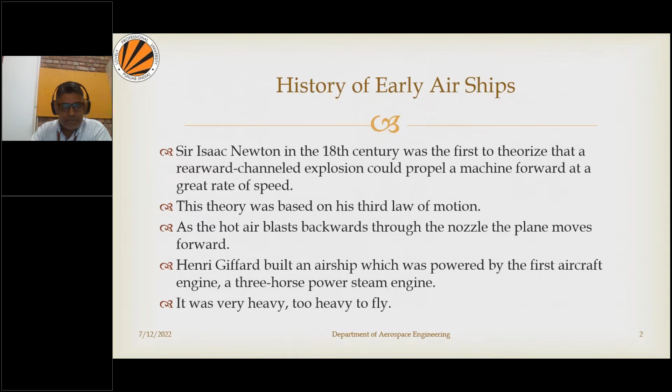And coming after that, Henri Giffard, which you could rightly see on my screen over here, this was Henri Giffard's airship. It was way back in the 19th century somewhere, and it was considered to be the most powerful one and the first aircraft engine. It was powered with the first aircraft engine, having a 3 horsepower steam engine. It was very heavy in comparison, and it was very heavy to fly also.

So this airship successfully flew on the 24th of September somewhere in 1852, and it covered near about 17 miles, approximately 27 kilometers. And the engine was not so powerful that it could overcome those prevailing winds, because once the aircraft is in the air, you find air coming from all directions. So Giffard had to return his flight back, and the top speed that was talked about at that particular time was 6 miles per hour.

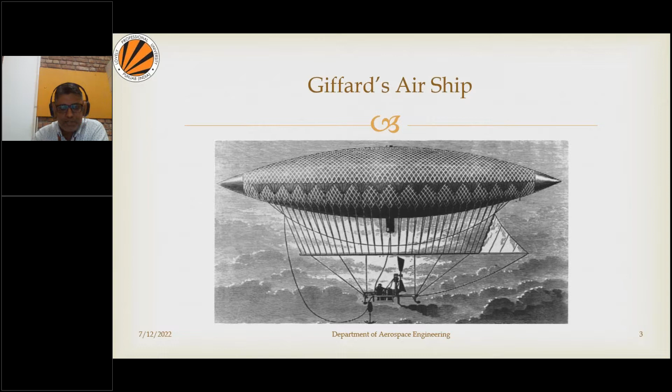However, he managed to circle this airship in slow circles, proving that if the weather is very calm, this airship would have been beneficial. There were further unsuccessful efforts done throughout this era, like Hiram Maxim, who also tried out with a certain triplane. In 1896, we had an unmanned airplane powered by a steam engine, called the Aerodrome.

And then further it came down to Otto Daimler in the late 1800s, where he invented the first gasoline engine, what we are talking about today as a petrol engine. And after that, everything came into account, so in 1903, something which we called the Flyer.

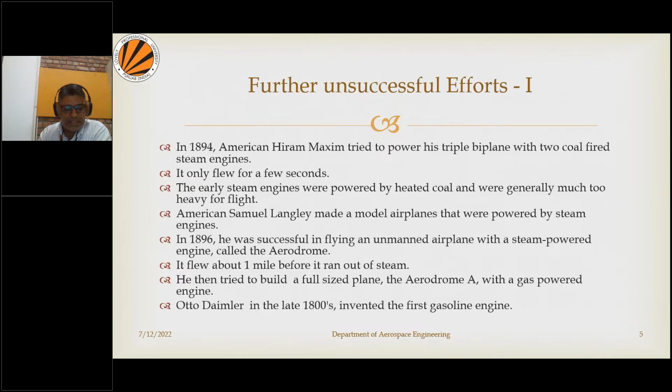The Wright brothers came up with a flyer that had a near 12 horsepower gas-powered engine. In the late 1930s, this gas-powered engine was being used as a reciprocating internal combustion engine, and it had a propeller as the sole means to propel that particular aircraft. So coming to this very important concept that everybody should know about.

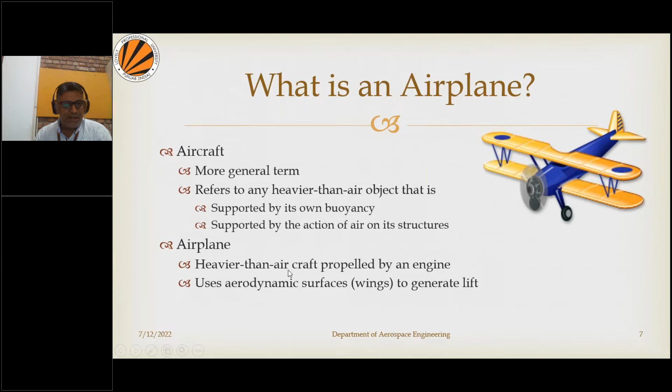What I want to talk about is, basically, what is an airplane? If I'm talking about an airplane and an aircraft, there are two different conceptions here. When I say aircraft, there's a difference between an aircraft and an airplane. Looking at this diagram, aircraft is a more general term referring to heavier than air objects supported by their own buoyancy and structures. An airplane is something heavier than air, but it uses aerodynamic surfaces to generate lift, like wings.

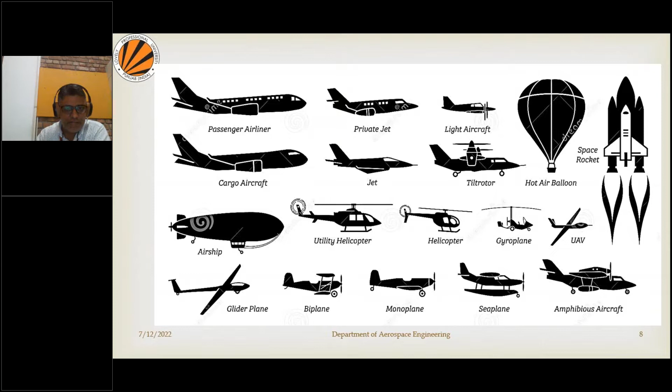So we can come to one important conclusion: every airplane is an aircraft, but not every aircraft is an airplane. That's because an airplane uses aerodynamic surfaces like wings to generate lift. That is the basic difference between an aircraft and an airplane, and that's what we talk about normally. So this is how it looks.

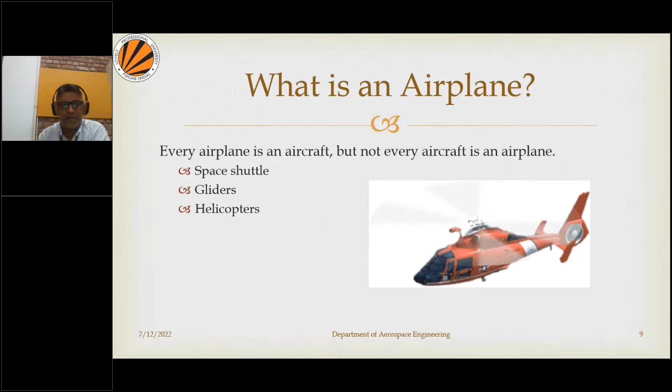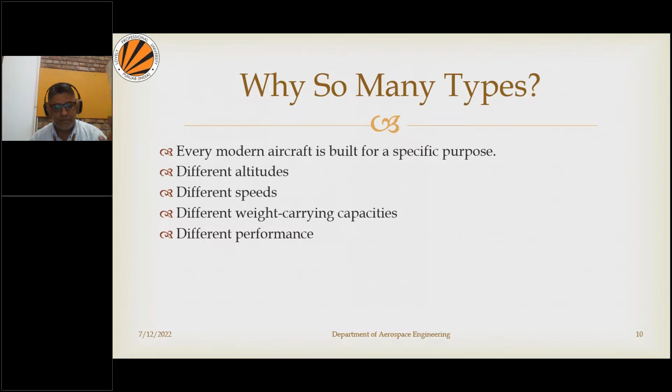Then, talking about why there are so many types of modern aircraft - it's because each is designed for a specific purpose, which can be anything: different altitudes, different speeds, different weight carrying capacities, different performance parameters. For jet aircraft, they are relatively lightweight, highly maneuverable, and very fast, carrying a small amount of weight including fuel, with refueling possible during long flights.

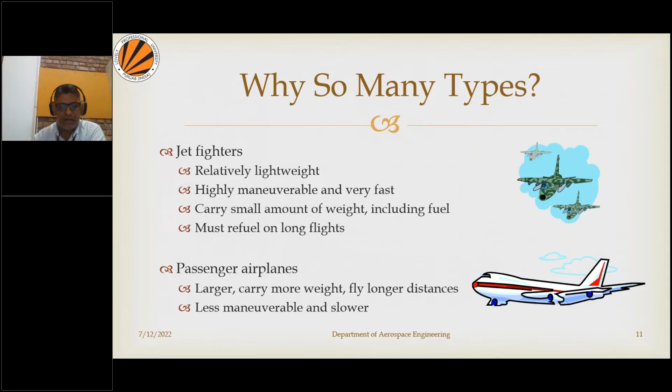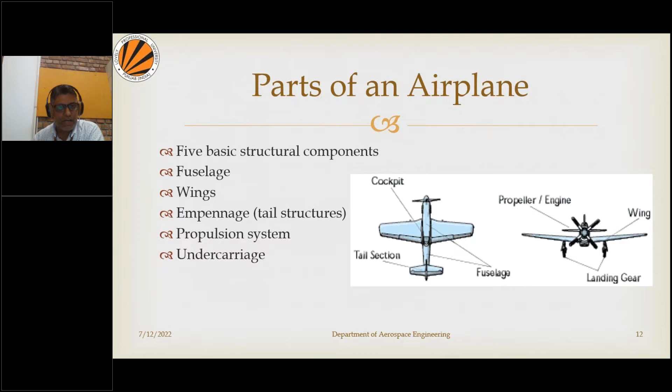And similarly, we have passenger aircraft. So every aircraft has its own ways and means, and is divided into parts accordingly. Coming to the basic parts of an airplane, we consider 5 structural components: fuselage, wings, empennage, propulsion system, and undercarriage. Everybody knows that, and these are the components we'll discuss.

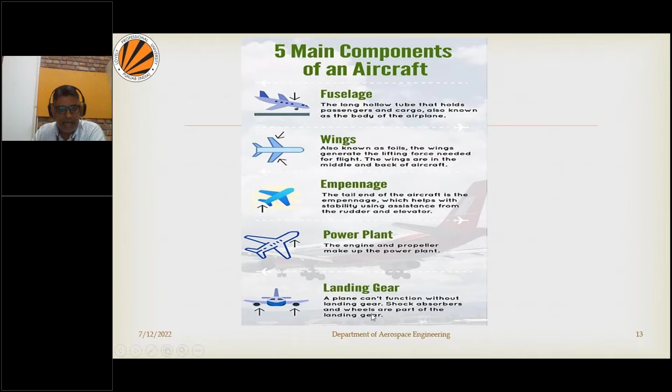We have the fuselage, then the wings, then the empennage. The empennage is the tail area, the tail end, which assists stability, providing stability for the aircraft. Then the power plant, and then the landing gear. These are the basic parts.

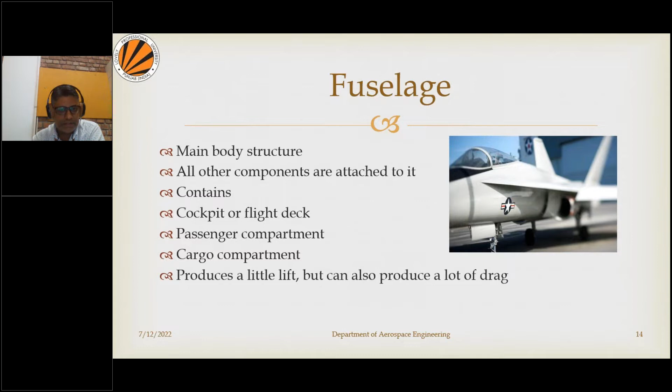Coming to the fuselage part - the fuselage is the main body structure, and all other components are attached to it. It contains the cockpit, passengers, and cargo, and it produces a small amount of lift, but it also produces a lot of drag.

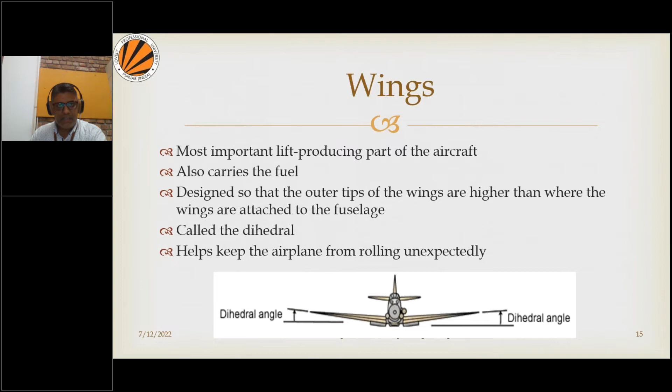So these are two kinds of wing classification, or rather the attachment or orientation of those wings - one is called the dihedral part, the other is called the anhedral part. Then when we consider the empennage part, this whole empennage section is considered the tail assembly.

The basic function of the empennage is to provide stability and control. It has two main parts: one is the vertical stabilizer, another is the horizontal stabilizer. The vertical stabilizer everybody knows, but what are the basic units of the horizontal stabilizer?

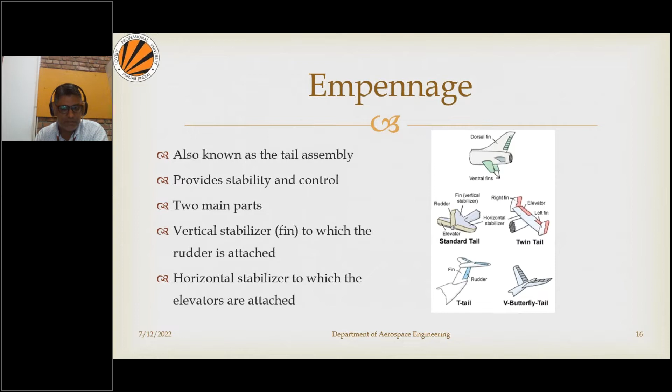Coming to the undercarriage part, these are also known as landing gears. They are made up of struts, wheels, and brakes, and can be either fixed or retractable.

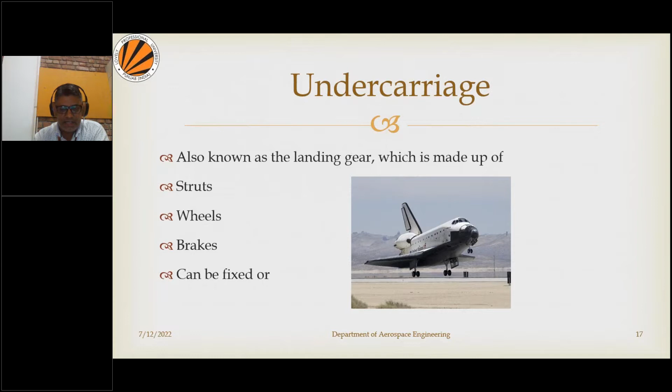Then coming to the main powerhouse of the aircraft, the propulsion system. What does the propulsion system provide us? It provides the thrust required for the airplane. There are different kinds of engines: piston engines, propellers, turboprops, turbojets, turbofans, and further scramjets and ramjets, which are considered on the rocket propulsion side.

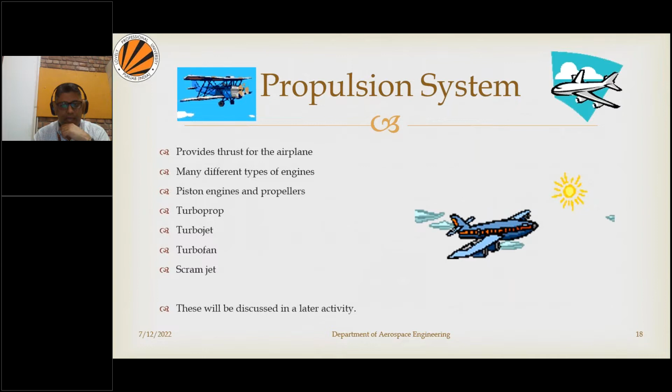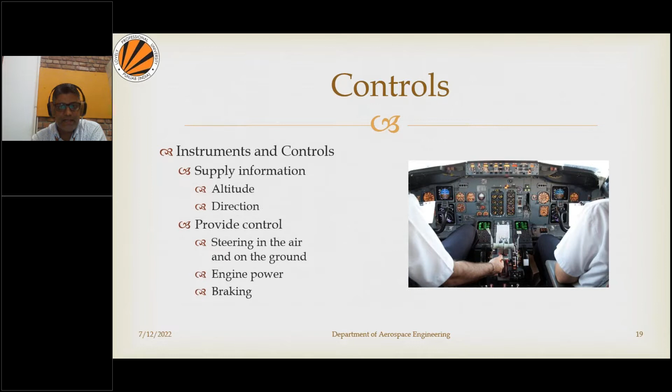Then we have certain controls, embedded inside the cockpit. These instruments and controls supply the altitude, your position, the direction in which you are flying, and how you steer. Engine power and braking system are also provided through these controls.

These are the three motions that we normally consider: this is called yawing, this is called pitching, and this is called rolling.

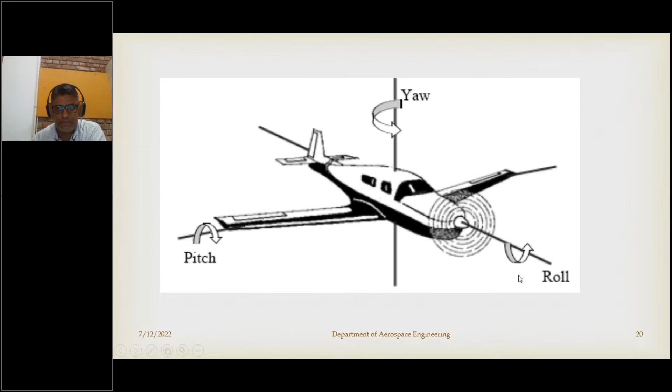I'll show it in more detail so you can understand it better. Okay, I'll come to that.

Before that, let's talk about the aerofoil. Every aircraft has wings, basically made up of aerofoils. An aerofoil is nothing but a two-dimensional part, considered as a 2D section of a wing. If you look at this wing, you can see the aerofoil shape, this is a cut view of a wing.

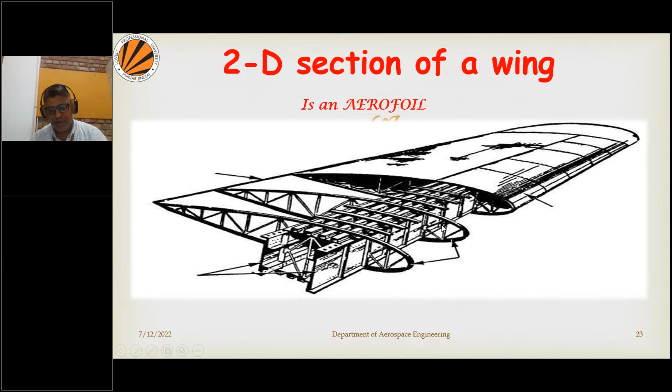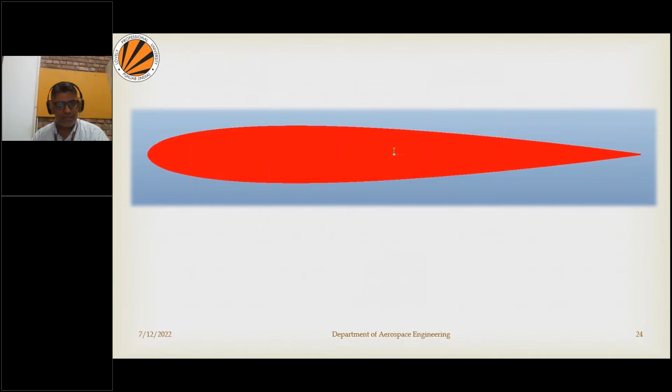Now the question is, why this particular shape? Why was this shape adopted for aerofoils or wings? The reason is very simple, and it's self-explanable in this slide.

There were tests and experiments carried out by scientists long back. On a flat plate, when we see the flow of fluid, which could be air, water, or anything, here we talk about air since aircrafts fly through it with air surrounding them.

So this air, when it flows onto this flat plate or wedge, gets separated, and you see circular wakes forming. In case of a flat plate, the disturbance of flow was very huge, causing a lot of drag, the resistance to flow is immense. Then came a shape that's bit circular, not exactly circular but close, and from flat plate to circular, the wake formation zone or disturbance behind it was less.

This is a sphere, and then a sphere with a fairing was attached. Once the aerodynamic shape of this body was increased further, you could observe the wake formation zone was less, meaning the resistance to flow was less.

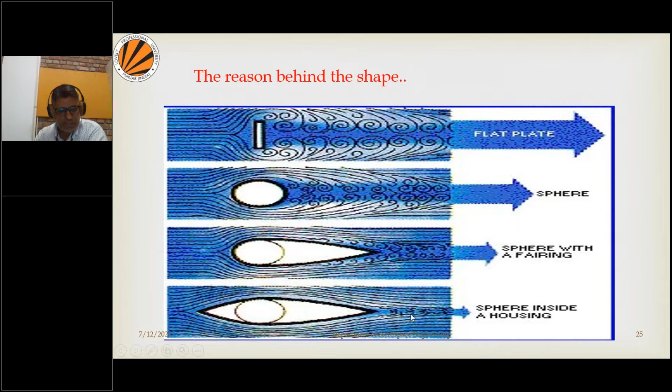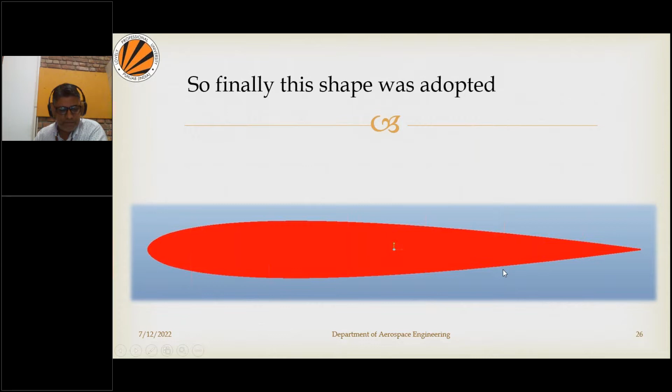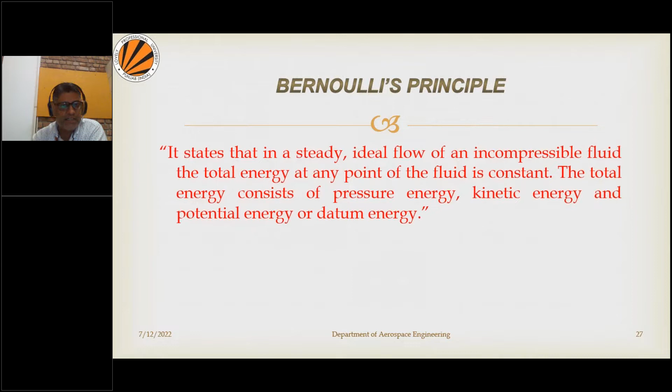The concept of this came from one important principle, that is Bernoulli's principle. Everybody knows about this. We consider that all these energies, that is pressure energy, kinetic energy, and the datum energy, all remain constant. So this is what Bernoulli's principle speaks about. Everybody knows pressure energy, kinetic energy, and potential energy per unit volume.

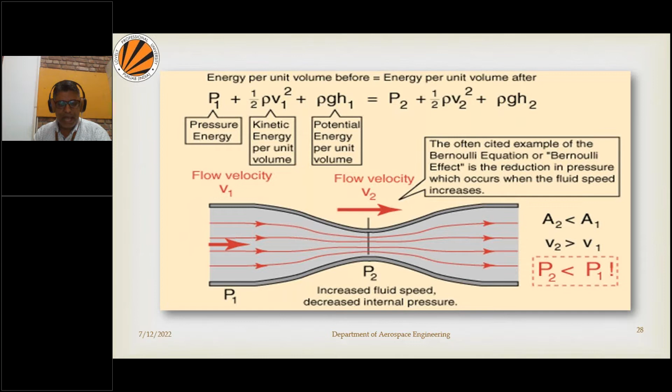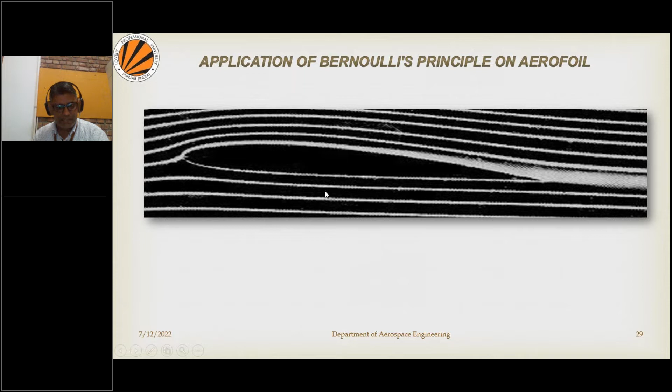This is how the application of Bernoulli's theorem can be applied onto these aerofoils, that is what we see. Now you could see it over here. Onto that aerofoil, the flow structure over here on the top surface is considered to be flowing through it. So if it is an aerofoil, the flow is considered to be streamlined, and this is the concept of how the pressure is being generated.

So if you find this wing, I told you this wing is made up of aerofoils. When the air is moving on to the upper surface of this particular wing, it is in fact flowing much faster, and so the pressure that is considered is less pressure, acting downwards. But the pressure of the air which is below the wing surface is considered to be more. So that's the reason why you see there is a difference in the pressure.

Due to that pressure difference, we normally get a lifting force, and that is the basics of lift force that we talk about. It is the difference of pressure between the upper surface and the lower surface of the wing which generates that kind of force, which lifts the aircraft upward from the ground.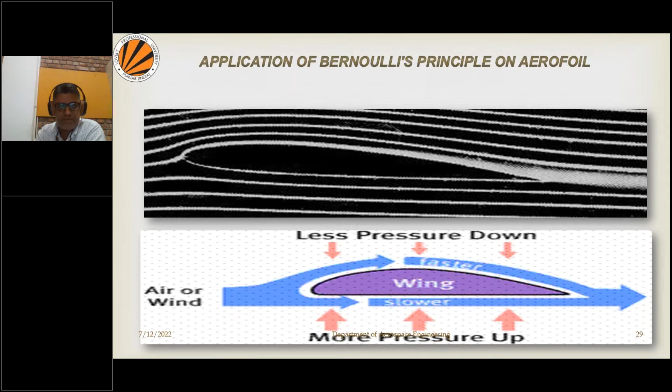The drag is something which is opposing this thrust. So whenever we talk about a flight, we need to understand that this thrust has to be much more in order to overcome this drag. That's the reason why we keep on changing engines. We talk about a propeller, a turbojet, a turboprop. So your engine has to be powerful enough to overcome that particular drag.

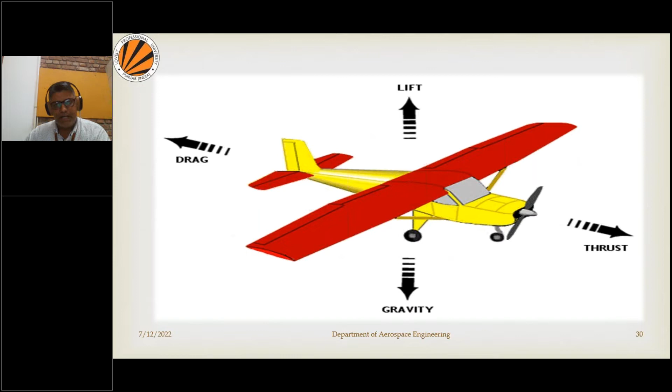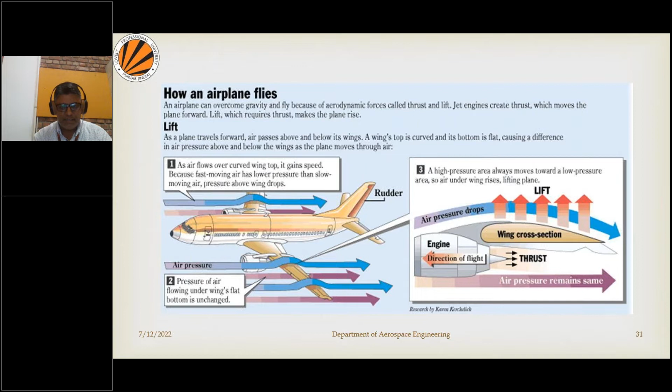Now the concept is, onto this particular aerofoil, how long can we talk about flow structures? How long can the flow be considered to be streamlined? Then came down a very important concept, which is considered to be the angle of attack. When I'm saying angle of attack, it is the angle between the chord line and the free stream, that is what we talk about.

That is considered to be the stalling of the aerofoil. So stalling is something where the flow is trying to get separated. Once the flow starts getting separated, you will no longer be able to get the maximum amount of lift that is possible.

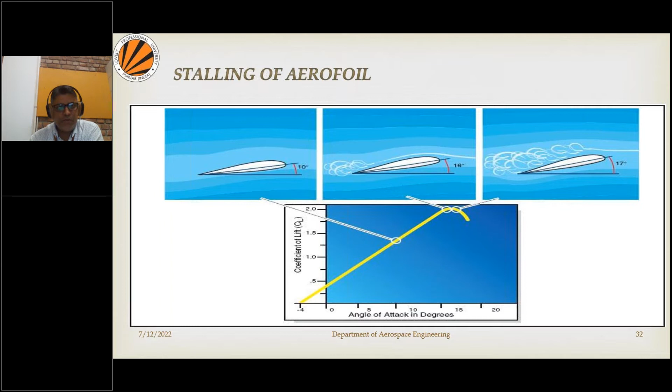Then we could talk about the stability and control part of it. This is what we discussed about, right?

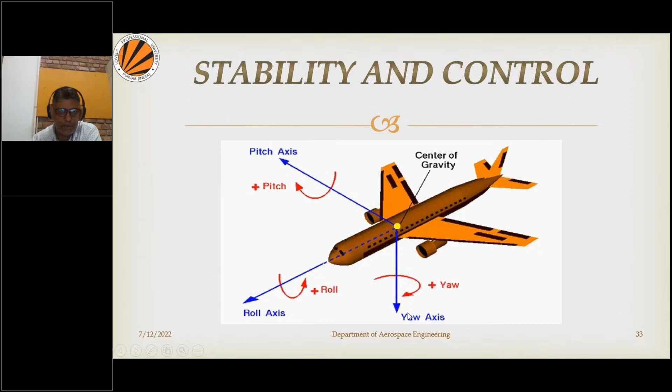So when you see an aircraft, we have three axes. One is considered to be the pitch axis. Whenever you see an aircraft, the axis which is passing through the wings is considered to be the pitch axis. The axis which is passing through the fuselage, running parallel to it, is considered to be the roll axis. And the one which is perpendicular to it, vertical, is considered to be the yaw axis. If you observe the figures carefully, you'll be able to understand that.

Now this is what is considered to be the nose up and down movement. So let's talk about the controls that are basically being utilized here. This is the empennage, and this is the horizontal tail. All these controls are there managing that. This is what is considered to be pitching—a pitching motion is something which is nose up and down.

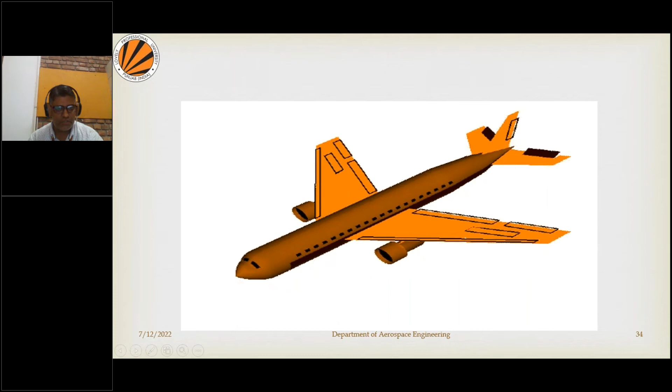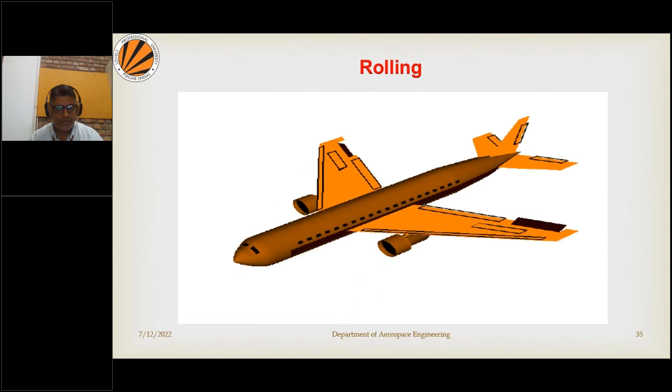Similarly, let's talk about rolling. Rolling is something about the roll axis. Once you're rolling it up, these are the ailerons. Up and down, this is considered to be rolling about one particular axis. So rolling is something which is sliding to the left and then to the right.

And then we have yawing. Yawing is something which is called directional, done by the rudders that you see at the back. It is something which is to the left and the right—yawing to the left, yawing to the right—just in order to get the directions.

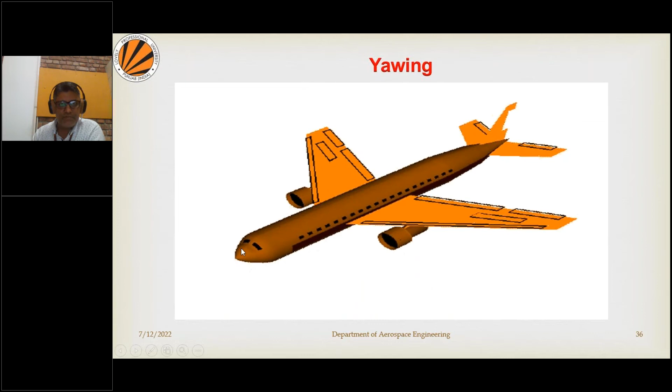Like if the pilot wants to turn from this point to go to a different heading, he has to switch on his rudders. He could operate his rudders in order to take up to a different direction. So that is what is considered to be yawing. These are the different motions that we talk about.

Coming to this horizontal stabilizer, these are the horizontal stabilizers, and these are the elevators. How exactly the forces are being acted upon them—that is the point of concentration.

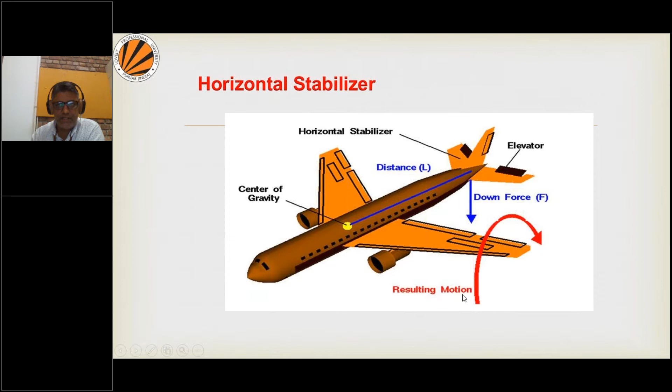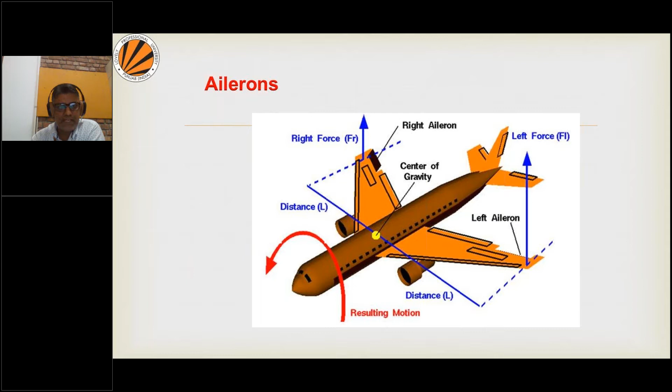And these are the ailerons that we see—left aileron, right aileron—and how exactly the forces are being balanced, the right force and the left force, to roll it. That is being done by the ailerons.

Then one important thing is considered to be spoilers. Everybody has learned about these spoilers. The spoilers are the ones which spoil your lift, because lift is what we use to operate the aircraft to move up. So if I am coming down or landing at an airport, I don't require that lift—I require more drag, because I want that resistance. I want the aircraft to slow down. So in order to slow down, we use these spoilers.

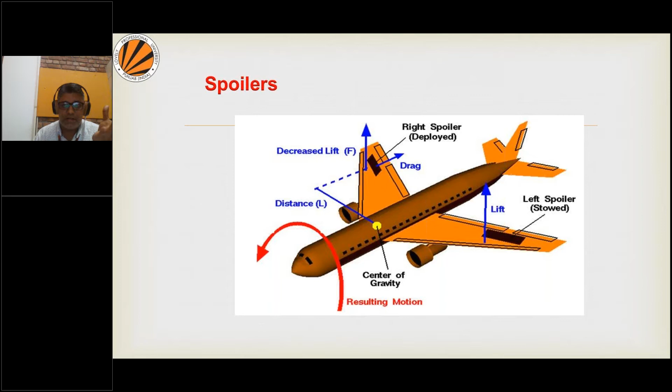When you are in an aircraft, you could have observed those spoilers opening up and closing. These spoilers are there to destroy part of the lift. The lift is being destroyed by the spoilers, and these are opened during the landing part only. Apart from spoilers, fighters normally utilize parachutes also, because these parachutes have a huge amount of resistance to the flow.

Then these are the vertical stabilizers, which I told you contain the rudder part of it. So horizontal and vertical stabilizers - these are a few of the maneuvers that we consider.

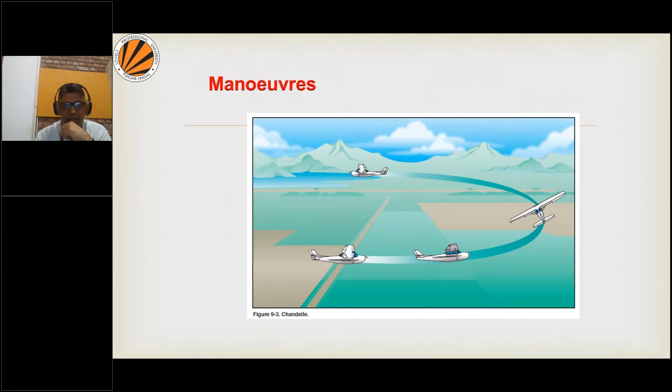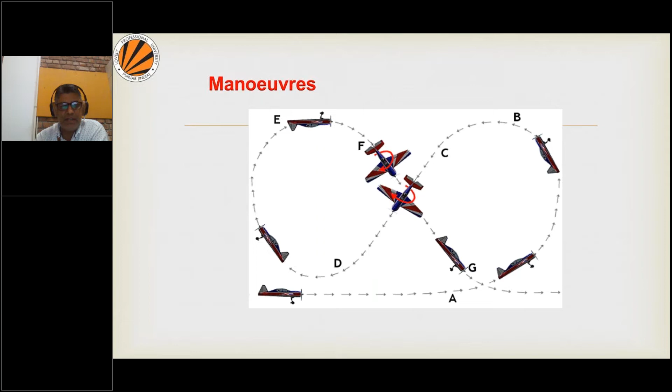Normally we talk about lightweighted aircraft performing certain maneuvers. I just wanted to show you some pictures of maneuvers, I'll not go into detail. These are certain spins - they can enter into a spin. So maneuvers can be of different kinds. This is a loop that could be taken by an aircraft, and these are done with a light-weighted aircraft, not a heavy-weighted one. Passenger aircraft are not supposed to perform maneuvers.

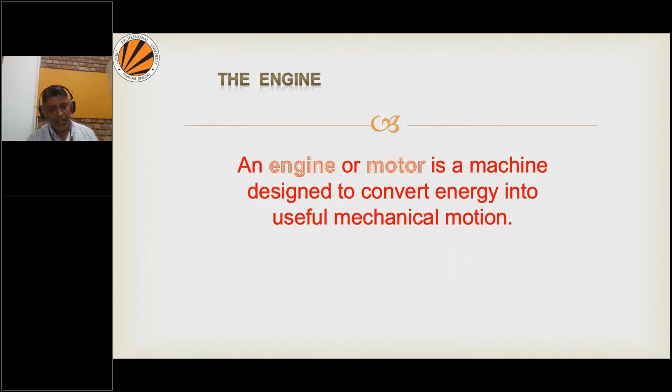Then the most important part is what is considered the engine. According to the definition, the engine is a motor or machine which is basically designed to convert energy into useful mechanical motion. When we consider these kinds of engines, there can be different parts of it. Basically an engine is a machine which tries to produce thrust to push an object forward.

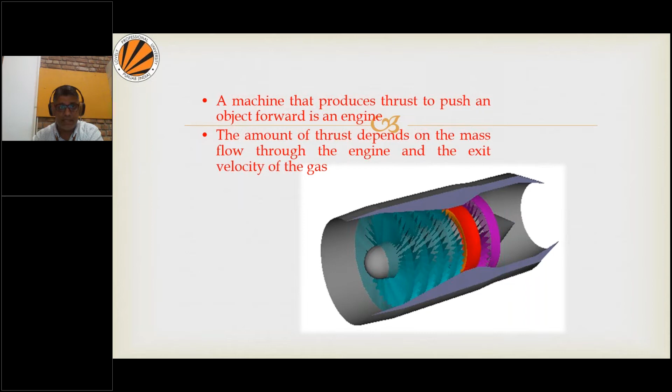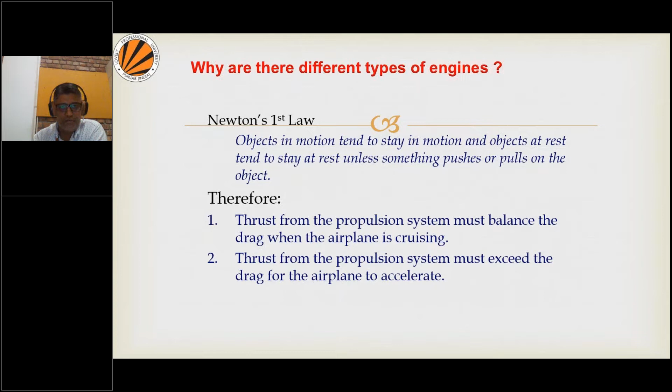Different types of engines exist, and why there are different types, that is all based on Newton's first law of motion. I'll not go into Newton's first law, I'll just show you the different types of propulsion systems. What are those? They are basically two.

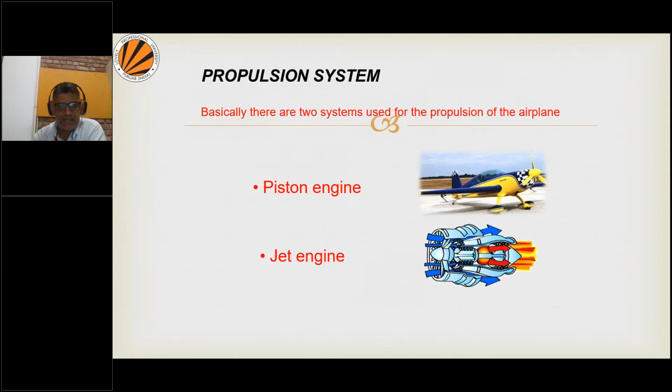When I'm talking about piston and jet engines - you have seen these piston engines readily, which lighter aircraft have, all those Cessnas and two-seater and three-seater aircraft normally have these piston engines. And when we talk about a heavy passenger aircraft like Boeing 747, 737, or Airbus, they all have jet engines. Jet engines are considered to be more powerful compared to other engines.

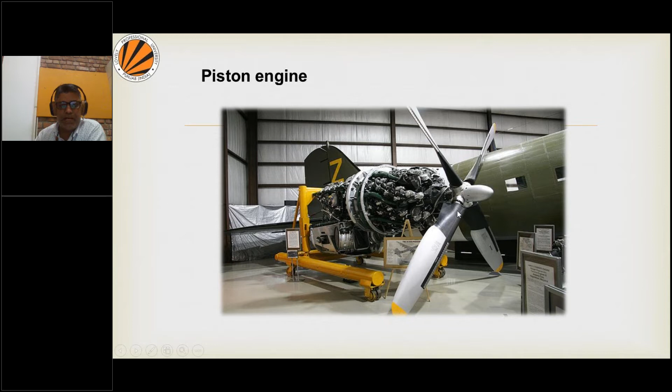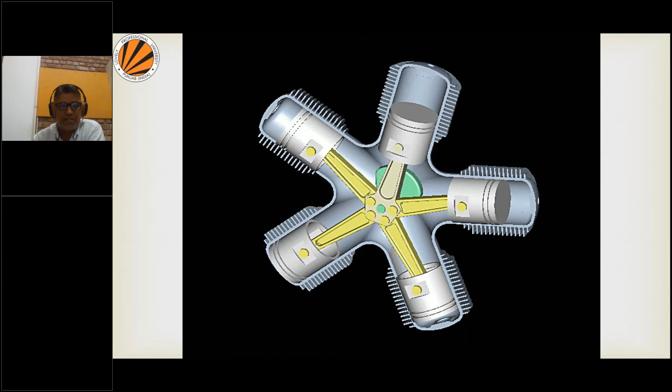This is what a piston engine looks like - it's considered a piston engine, having a propeller over here at the top, which basically rotates. These are done with piston engines. This is what is called reciprocating, having cylinders and pistons all together where it works. It could be a 4-cylinder, 3-cylinder, all together. So this is the piston part of it.

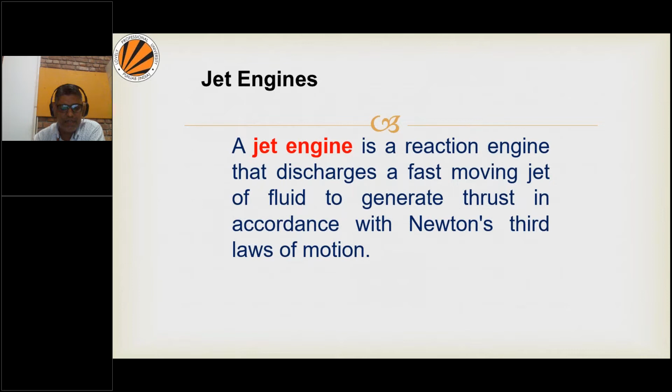Then the jet engines - what exactly do jet engines do? These are considered reaction engines. I'll show you the types basically - these are the various types of jet engines. You can talk about a turbojet, a turbofan, then a turboprop. We have a ramjet engine and a turboshaft engine, and scramjets are also there.

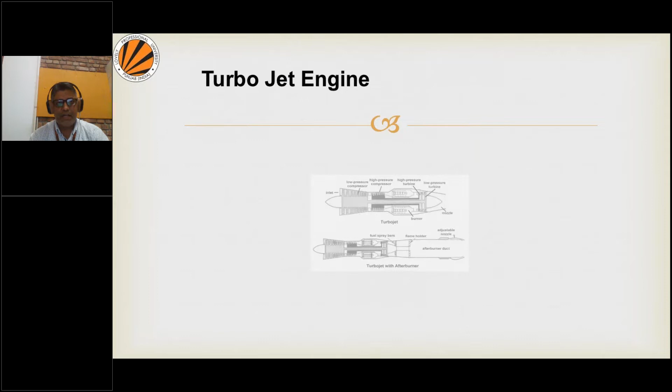Coming to the turbojet engine - a unique feature of turbojets is that they have compressors and turbines in tandem. The compressors suck in air through the inlet, compress it, and further channelize it to the combustion chamber where it is burned, then further expanded down to the turbine. This turbine basically drives the compressor. You'll also have a burner, a nozzle, and the exhaust exits through the nozzle with heavy velocity.

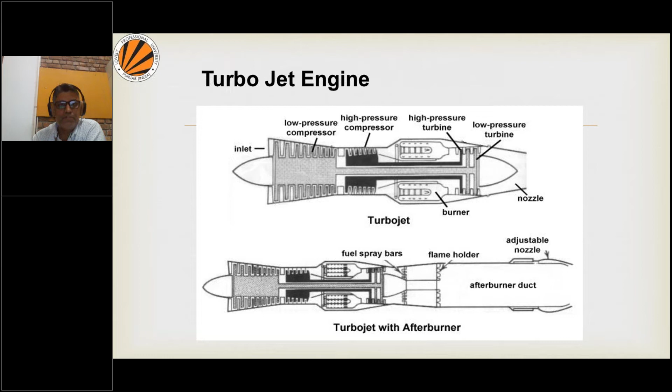Sometimes these turbojets come with an afterburner also, because there is sometimes fuel left along that needs to be burned too. So that is how the turbojet engine looks like. And then you talk about a turbofan.

This is something which is called a turbofan engine, where we have a certain sort of bypass air also, which is moving in. The same comprises of compressors and all.

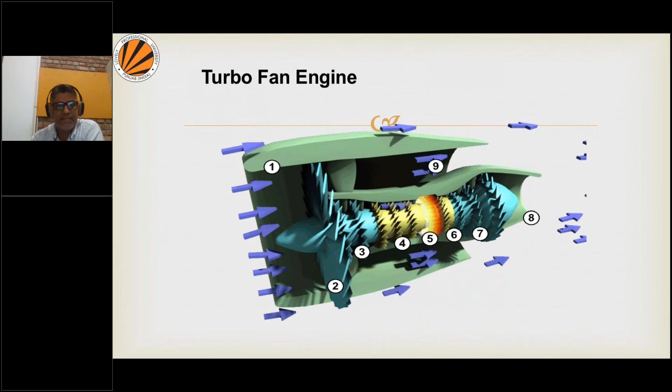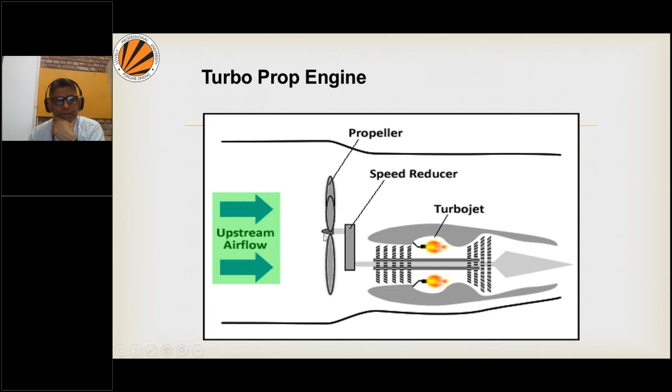And then we have a turboprop. There's a propeller which is moving into that upstream part of it. Then you have the gear reductions, which basically reduce that speed. This is where a propeller is attached, and further the fuel is being burned - the combination of turbojet.

And then the ramjets. These ramjets are considered to be an important one. One important thing is that these ramjets do not contain any moving part. These ramjets are basically being utilized for rockets and high-speed propulsions. Like when we're talking about rocket engines, they all have ramjets, right? So we need to propel that particular engine further into space, because they don't have a moving part.

So they require a certain amount of thrust to be propelled first. Initially they are being initiated with certain sort of rockets. The Mach number we're talking about is considered to be greater than 1. Further, in the combustion chambers, that air is being compressed and burned, and then further it is being exhausted. So all these ramjet engines are considered to be without engine - they don't have compressors and turbines, they don't have any moving parts. But initially they have to be boosted up using rockets. So these are the ramjets.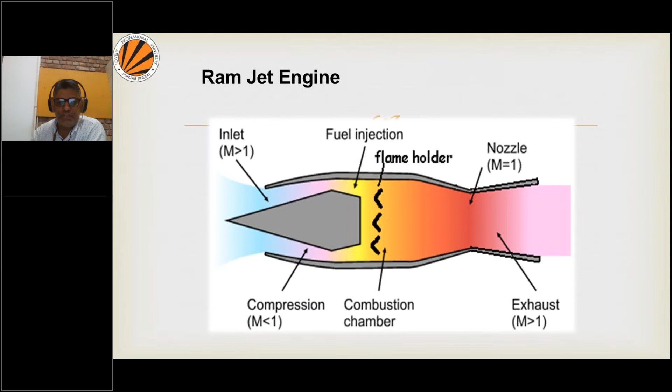And then we have a turbo shaft, which is having a gearbox attached to it also, where we have gear reductions, where you can reduce that speed part of it. And these are very obsolete nowadays. So what is basically being utilized normally nowadays is turbojet engines only.

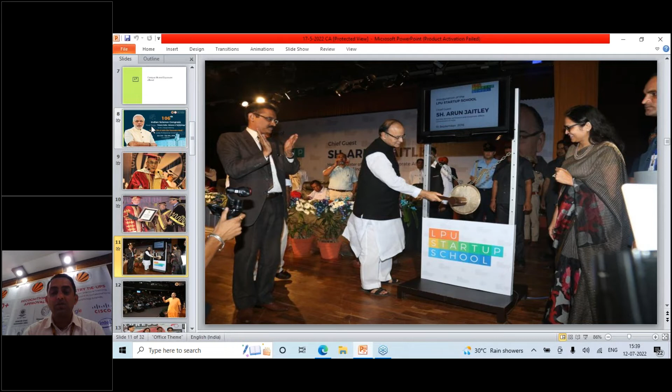None other than our ex-finance minister Mr. Arun Jaitley ji inaugurated the startup school at LPU. Then Gaur Gopal Das, the spiritual guru, was there with us to share his life experiences with all the students and faculty members.

None other than Bollywood icons like Shah Rukh Khan, Deepika, and many others, you will find them here with us, with our students, sharing their experiences. Then Mr. Dhoni was there with us in one of the events.

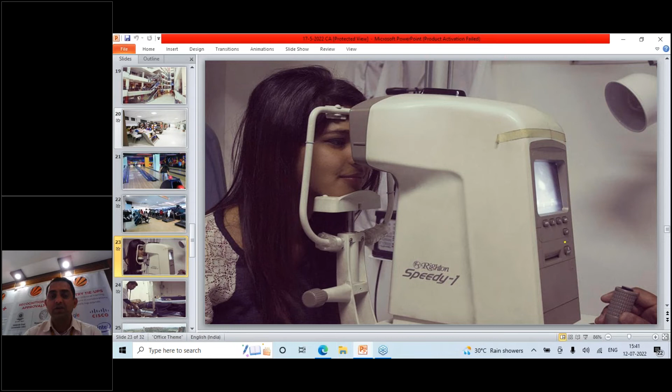Of course, the recreational activities available within the campus: you can see the bowling area, then the gymnasium, and of course the hospital. We have a 25-bedded hospital with a dental chair, and these are the inner views of the hospital.

Okay, now shifting to the other part. If a student wants to know the detail of a program they are interested in, they need to visit our site, lpu.in, which is the website of LPU.

Once you reach the very first page, you will find a tab by the name Admissions. Once you click this tab, you need to search the programs you're interested in. Those looking for undergraduate programs look for after-12th programs, after-graduation PG programs, after-PG programs, doctoral programs, and 10th-based diploma programs.

Today we were discussing aerospace engineering, so I'd like to share the details of that program. I'll click on undergraduate program, then this tab, regular program. Under this you will find the different streams available with us, which will help you build a bright career.